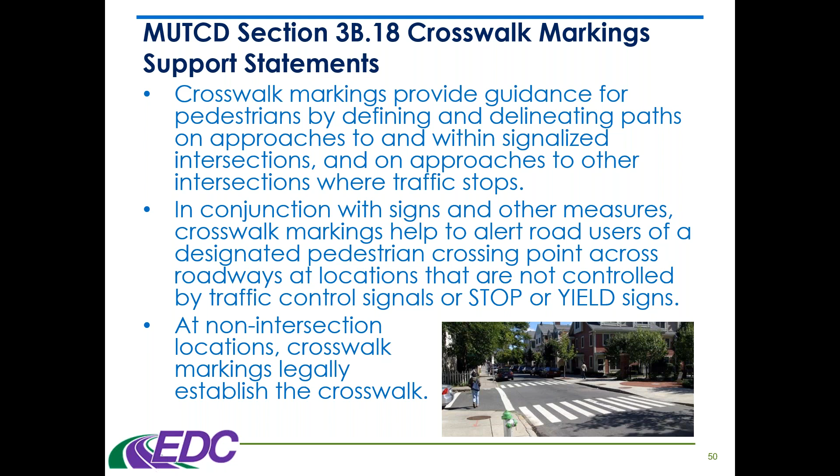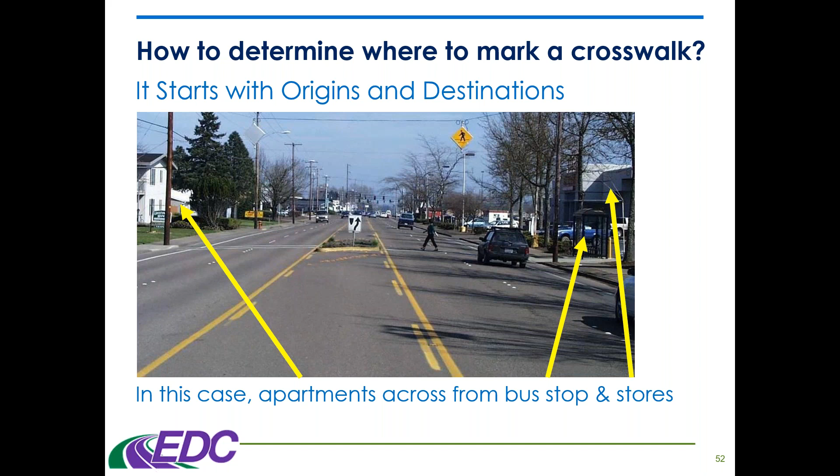This past week we left off right around here. We got into what the MUTCD, the standards involved with crosswalk markings, from the standards to guidance. And then we had a little discussion at the end about how to select a location for a crosswalk. You want it to make sense as far as looking at land uses, origins and destinations of the pedestrian. Like in this picture, we've got apartments on one side and commercial activity, stores and a bus stop over on the other side. So it just made sense to have that location right there.

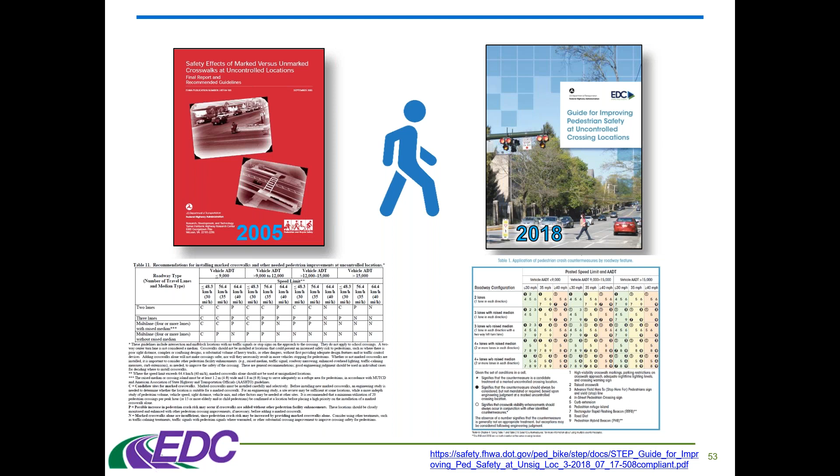And we talked about some of the resources available for you to research on your own. There's one from 2005 that covered the safety effects of marked versus unmarked crosswalks at uncontrolled locations, with a final report and recommended guidelines. And then a 2018 guide for improving pedestrian safety at uncontrolled crossing locations. And the one on the right has a table we're going to be utilizing as part of this class, a very important part of this class. We're going to delve into how to use that table here in just a little bit.

So today we're going to start off talking about the guide for improving pedestrian safety at uncontrolled crossing locations. It's called the STEP guide. As you can see on the right, it's a 6-step process for improving pedestrian safety at uncontrolled crossing locations. The majority of this workshop is going to focus on step 4 of these 6 steps, which is select countermeasures. As far as number 2 there, you see inventory conditions and prioritize locations.

Let's talk about that a little bit. The city of Seattle did not apply consistently how they installed their crosswalks, so they went back and installed their crosswalks per this table that we're going to be utilizing. It turns out that they used to lose lawsuits when there were pedestrian crashes, but now that they've used that table, they no longer lose lawsuits. So they actually removed some crosswalks with a stipulation that they had a priority list for future improvements. That is a lot like the ADA transition plans. Familiar with those?

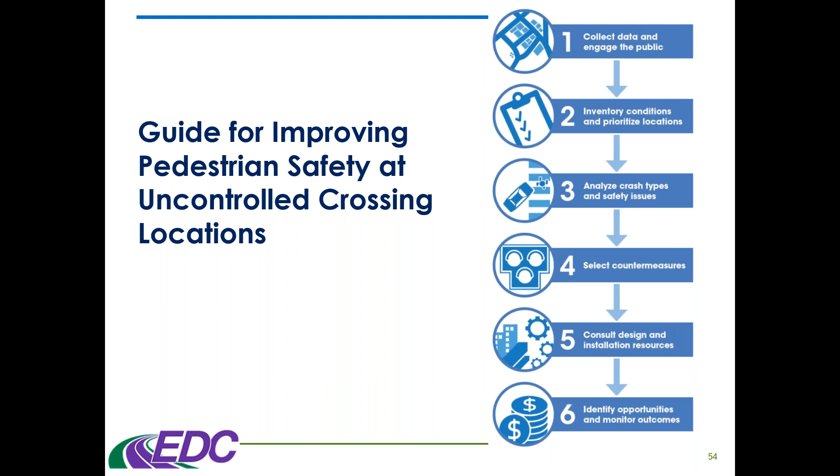And so this is the table that I'm talking about. It's one of the handouts on the right inside your webinar box. This is step 4, select countermeasures.

So what we have is the pedestrian crash countermeasures by roadway feature. On the left, you have your roadway configuration. You're selecting what type of road you're on. Are you on a 2-lane roadway, 1 lane in each direction? Are you on a 3-lane roadway, 1 lane in each direction, and a center turn lane usually?

It also says raised median. Then you have 3 lanes without a raised median. And then the next 2 are 4+ lanes with and without a raised median.

Across the top, you've got 3 categories of average annual daily traffic. The first one is less than 9,000. The middle one is 9,000 to 15,000, and the far right is greater than 15,000. Each one of those 3 is broken down into speed limits on those roads: less than 30, 35 miles an hour, and 40 and greater.

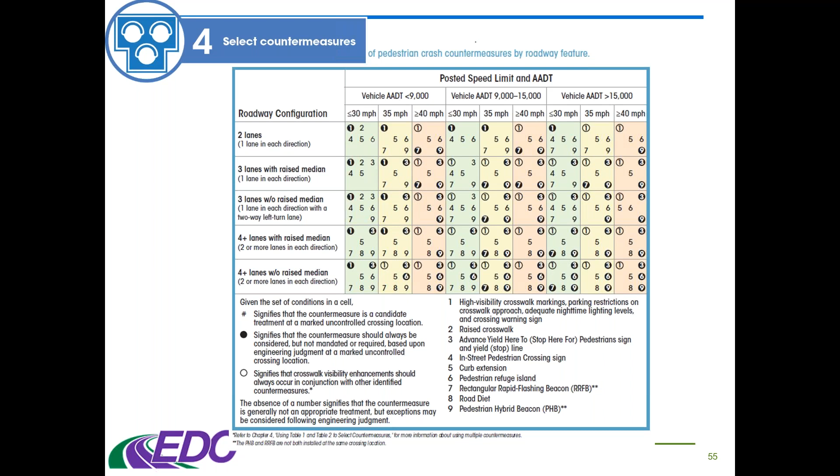Okay, so here is table 2, safety issues addressed per countermeasure.

As you go down there, yes—I don't know if it's just me, but can you move your microphone a little bit closer to your mouth? I think we could improve our sound quality a little bit here. Try it now. Closer—is this better? Yeah, that's definitely better. Thanks, okay.

Okay, so this is a table. On the left, it shows you the pedestrian crash countermeasure for uncontrolled crossings, and across the top is the safety issue addressed by that particular countermeasure. So when you're reviewing your crash data, you can see which one of this list of countermeasures would best address the issue noted in your crash data, so you know which countermeasure to select.

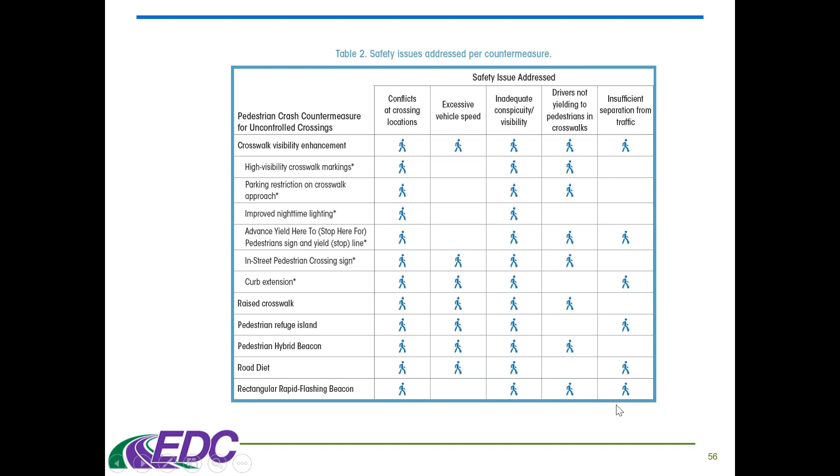So let's go ahead and do a quiz—like a quiz, it's actually just a little practice using this guide. We have a question at the top of the screen: what step treatment or treatments would you install in this particular situation?

So we're on a 35 mile per hour speed limit roadway. The roadway consists of 4 lanes with a 2-way left turn lane, and the average daily traffic is 14,500. So class, I want you to see if you can figure it out.

And they should put their answers in the question box? Yeah, let's put some questions to get a little practice using the question box as well. You can just put the numbers—you don't have to type in the whole answer, just the number associated with it.

All right, any comments? Somebody said 1, 3, 5, 6, 7, 8, 9. Next person said 3, 7, 9, 1, 3, 6, 7, 9, 1, 1, 3, 5, 6, 7, 8, 9.

This almost reminds me of that 80s song, you know, 8, 6, 7, 5. Sorry. Ray frequently breaks out a song in our office. Anytime you mention 80s music, it just puts me in a good mood. So thanks for that.

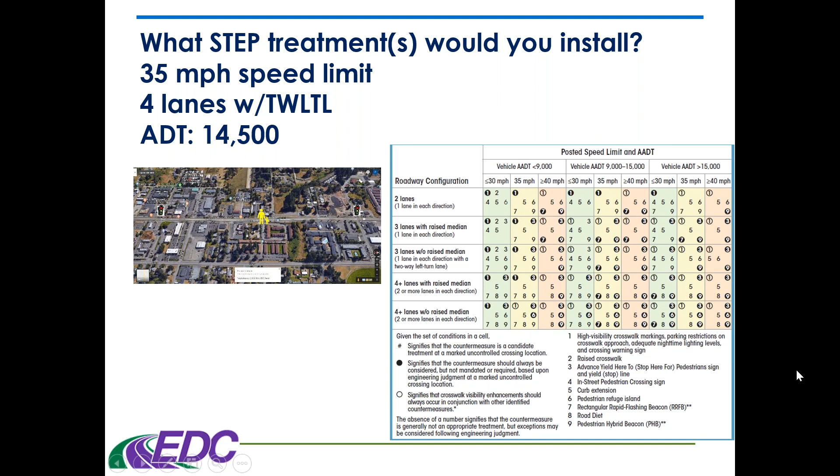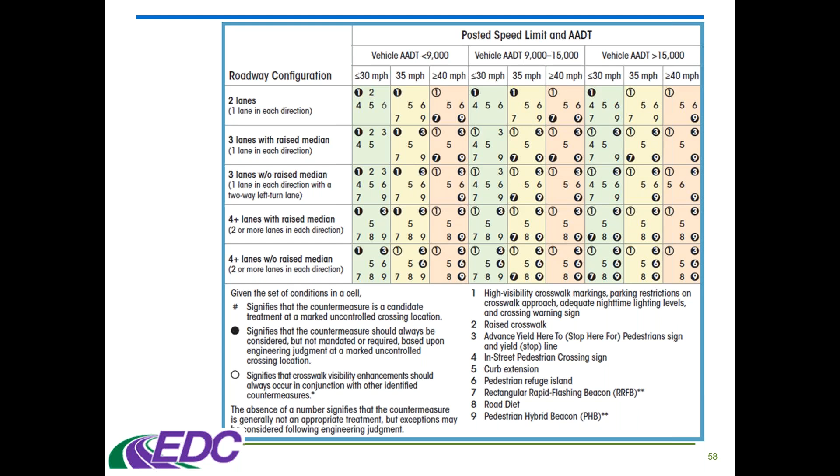Okay, let's move on. Now that we've had our practice, this is, I guess I could have turned the page so we could actually have a little easier time of looking at it there. There's the blow up of this table. Okay, so now let's get to the fun stuff, which is the treatments.

We call these treatments the Spectacular 7. You could play off the Marvel or DC comic superheroes, because we think of these as spectacular in the fact that they save lives.

And even the RRFB, the rectangular rapid flashing beacon, it actually died and came back to life. When it first came out, everybody was really gung-ho about it, and then all of a sudden they said, uh-oh, no, we're not. Then after further review, it's back on the list. So it actually came back to life like a superhero. That's why we refer to these as the Spectacular 7.

So when I say Spectacular 7, I'm talking about this list: crosswalk visibility enhancements, raised crosswalks, pedestrian refuge island, the RRFB, PHB (pedestrian hybrid beacon), road diets, and the leading pedestrian interval.

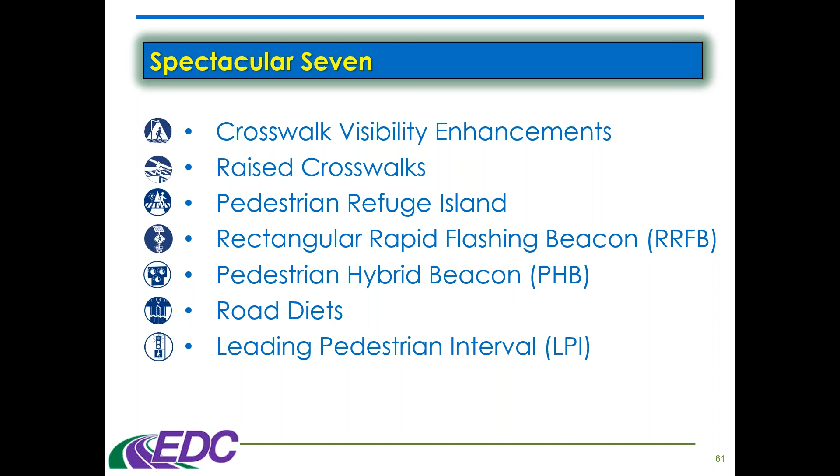First on the list we want to talk about is crosswalk visibility enhancements. We start with them because we introduce these from the simple and lower cost countermeasures to more complex and higher cost countermeasures. Simple and complex can refer to both the device or the roadway.

Road diets is down towards the bottom, even though it could fall under lower cost if it's planned ahead to where they are doing a resurfacing project. However, it really wraps things up well, since it has many benefits to all modes and allows many of the treatments to be installed, like median crossing islands and curb extensions. Reducing the number of lanes also reduces or eliminates the multi-threat situation, which in turn can keep an agency from using higher cost treatments like the PHB.

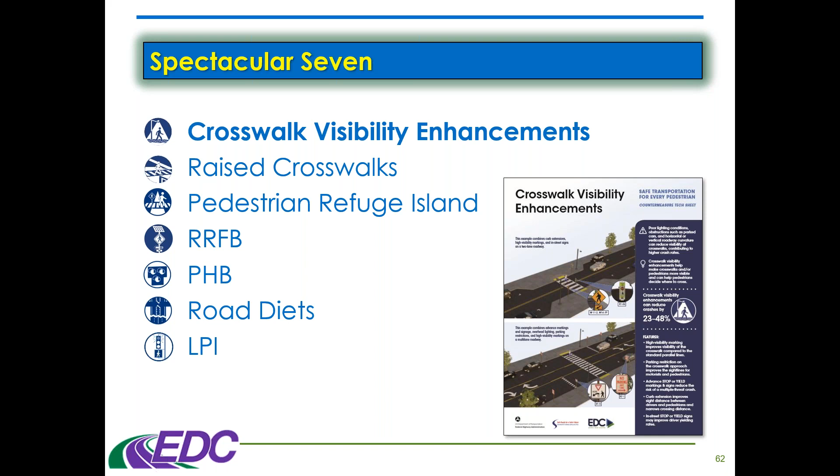There are several items that fall under crosswalk visibility enhancements, which we're going to be covering in the upcoming slides. But I think maybe I can show you a cool video that shows these before we go into that. Let's see if I can get this video to work for you.

Just remember to unmute yourself at the end, Ray. Okay. Takes a few seconds to upload. Oh, wait, I gotta do this.

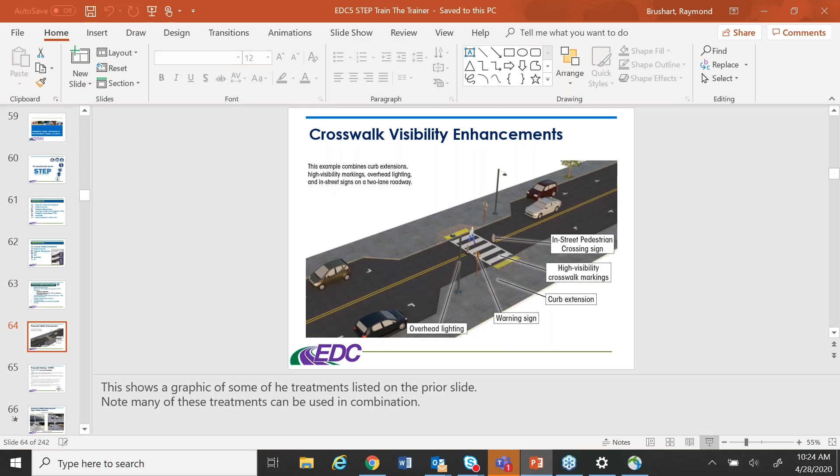Okay, that was a pretty good video, wasn't it? So it showed a lot of these on this list in that video. In fact, I think it showed all of those, so it's pretty good.

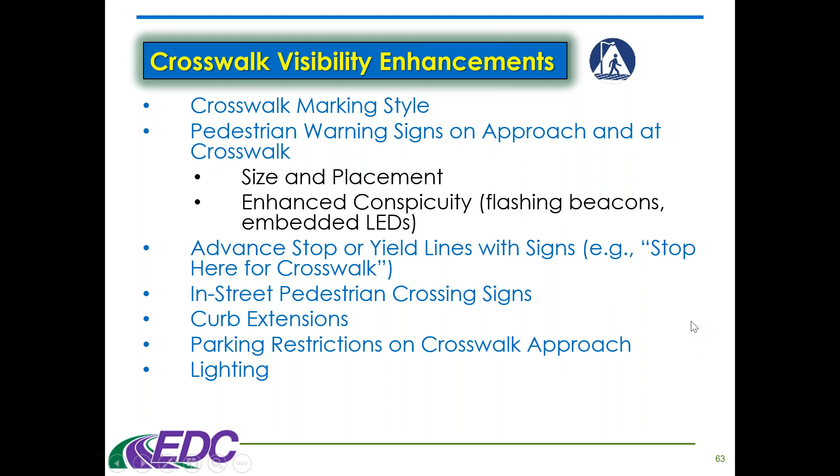So crosswalk visibility enhancements. Here we see in the picture some treatments listed on the prior slide, and many of these treatments can be installed in combination with others. Here we see curb extensions, high visibility markings, overhead lighting, and in-street signs on a 2-lane roadway.

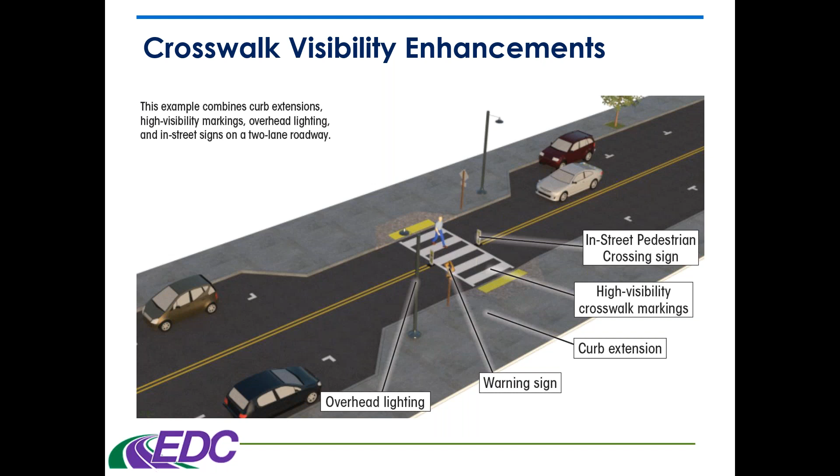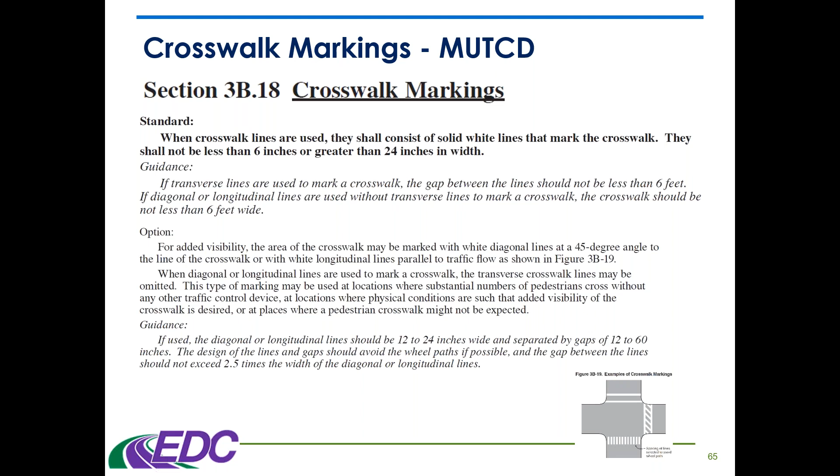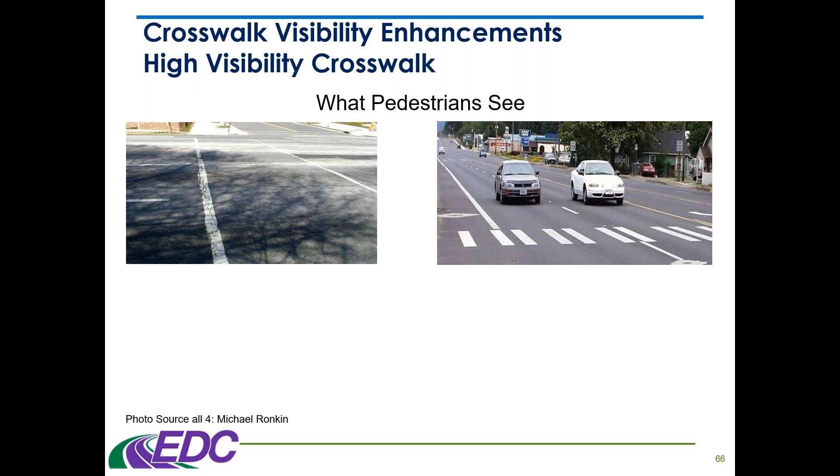And also, if you remember from our speed video in round 1 of this webinar, we had a cool video from Australia showing the difference that when the driver slows down just 3 miles per hour as they approach a high visibility crosswalk. So maybe someone seeing the high visibility crosswalk on the right just might slow down those 3 miles per hour and make a difference.

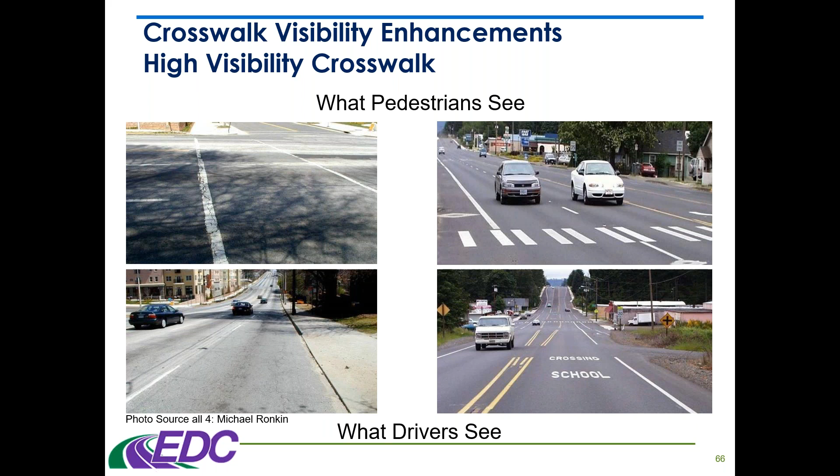So there was a crosswalk visibility study conducted back in 2010. The objective was to investigate relative daytime and nighttime visibility of 3 different crosswalk patterns: the transverse lines, which are those 2 lines on the left, and then continental and bar pairs. They're kind of similar looking, but there are some differences. So this study delved into researching if there's any significant difference for the driver to detect these as they approach.

There were 78 participants, about evenly divided between male and female, and between younger and older groups, younger than 55 and older than 55. They used instrumented vehicles on an open road route on the Texas A&M University campus. Data was collected during the day, either sunny and clear or at most partly cloudy, and at nighttime with the street lights on.

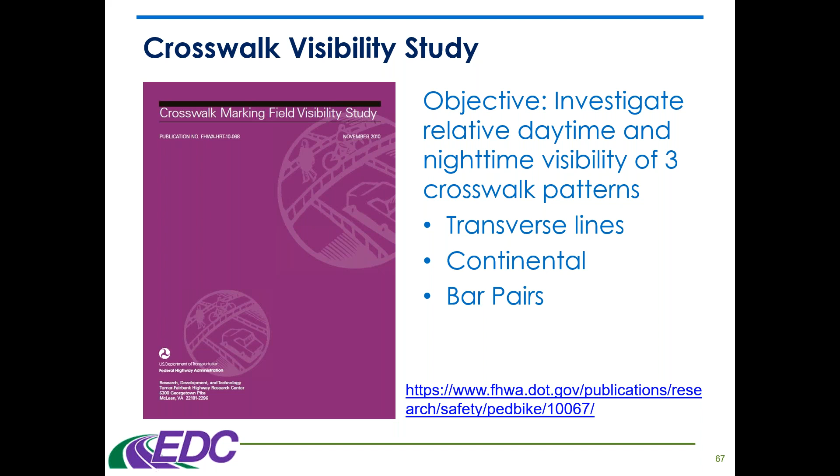For the existing mid-block locations, a general observation was that the continental markings were detected at about twice the distance upstream as the transverse markings during daytime conditions. This increase in distance reflected 8 seconds of increased awareness of the presence of the crossing at 30 mile per hour operating speeds.

That was very significant. So here's some more pictures from this study. The top picture shows us the transverse markings, the middle picture is the installed continental markings, and the bottom picture is the installed bar pair markings.

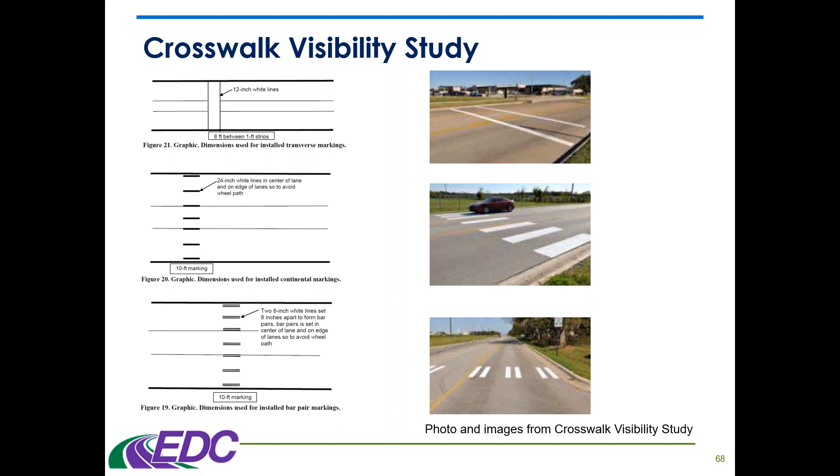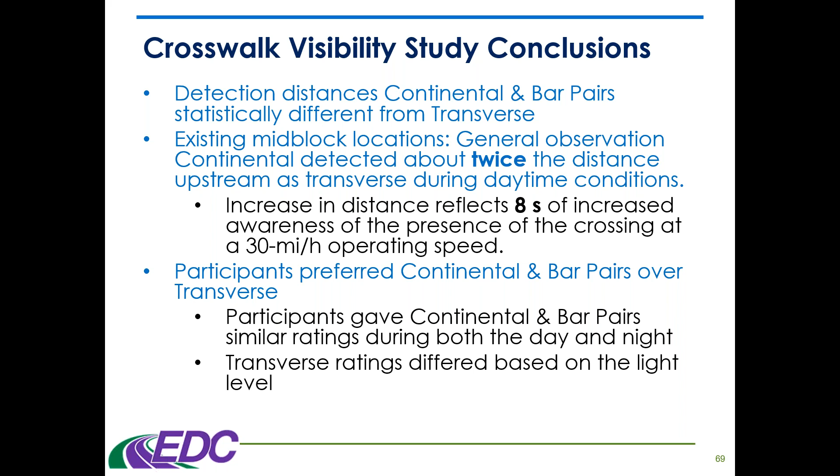So, the conclusions of the study: the continental and bar pairs were statistically different from the transverse lines. The general observation for the mid-block was that they were detected about twice the distance upstream as transverse during daytime conditions, reflecting 8 seconds of increased awareness of the presence of the crossing at 30 miles per hour operating speed. The participants preferred the continental and bar pairs over transverse, and gave continental and bar pairs similar ratings during both day and night. Transverse ratings differed based on the light level. Those are some conclusions from that study.

So let's take a look at how it is possible for the continental and bar pairs to provide greater visibility. As we see in this picture, see what the driver sees. He can detect that lateral 12-inch stripe at a distance of 300 feet. But the angle is different because of how the bar pairs are laid out there, so it's easier to see from that distance.

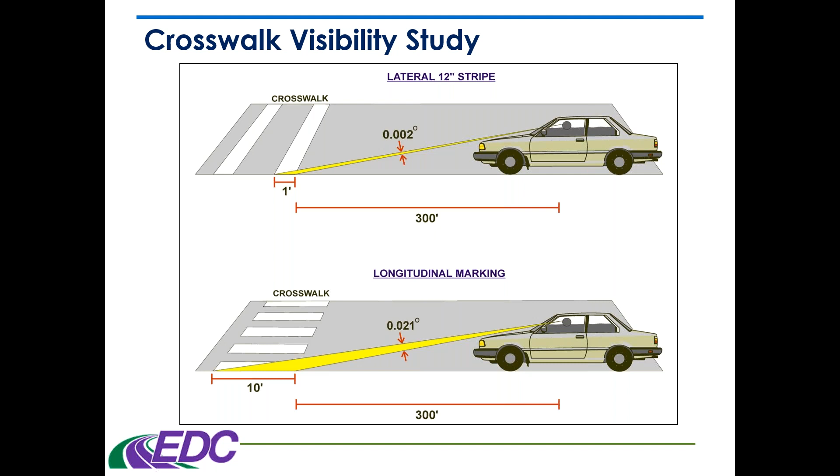Okay, so those are the crosswalk stripings there. Now let's take a look at textured crosswalks. How effective are they?

So the next 5 slides, we're going to cover this issue as we're seeing more of these textured crosswalks due to agencies wanting aesthetically pleasing roadways. The images during the public meetings look great, but one needs to consider them long-term as shown on the next couple of slides. They do look very pretty in this picture.

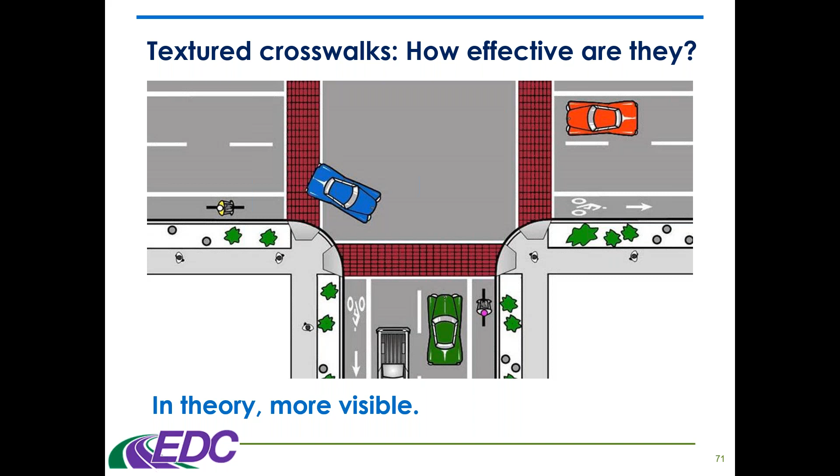And here's one with bricks. So you have your brick crosswalks. Turns out they are prone to failure after a little bit of time, as you can see. They can be difficult for wheelchair users. So one of the things we need to consider when we make these decisions is maintenance of this roadway.

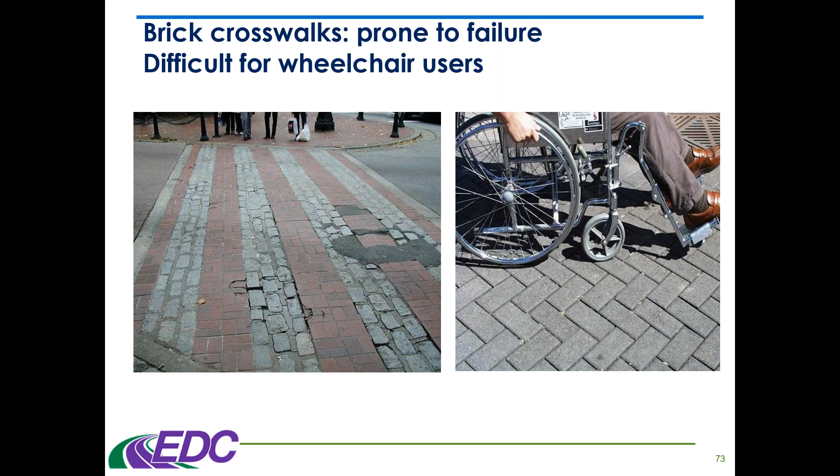Maintenance should always be considered. In this case, maintenance people need to have a saw. In addition, people in wheelchairs feel the bumps a lot. Can you imagine if someone's trying to cross the street if they had spinal injuries? So you have to consider that.

Ray, there's a question in the question box. I'm not sure if we have the answer to this, but are brick crosswalks ADA compliant?

We can always find out. Yeah, I mean, they had to get approved somehow, but I don't know. Yeah, we'll dig into that one. Let me email a couple people while we're on here.

They're probably ADA compliant when they install them. It's just a matter of, as you can see, what happens over time.

I didn't have to email anybody. Here's the answer from another one of the participants. It says, yes, they are ADA compliant if there's no bump greater than a half inch.

So I would imagine that has to have ongoing monitoring then. Hey, I went to Ohio University in Athens, Ohio, so I'm all about brick streets.

They do say that over time the bumps tend to worsen. Yeah, I would say you have to have a good maintenance program.

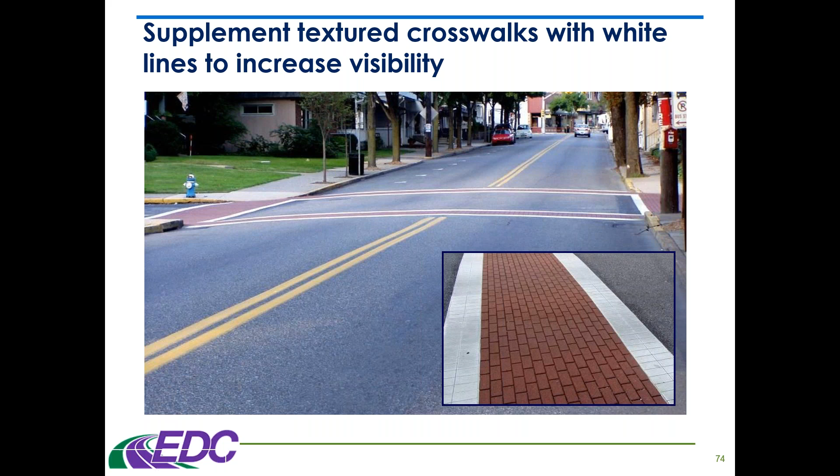Okay, class, let's take a look at these pictures here and you tell me if these are MUTCD compliant.

Go ahead and put your hand up. Yeah, they're responding. I'm hopeful this means that quite a few of them have also seen the webinar we hosted on compliant crosswalks.

One person said yes because they stand out very well, but the majority are saying no. Some people said they look good, but they don't appear compliant. Some are saying that the zipper pattern is a no, but the yellow is a yes. Another person said yellow is not an approved color. Well, they are pretty though.

General sense seems to be no. Okay, so normally the responses are mixed, but it turns out neither of these are compliant.

So on my next slide, I'm going to provide the text of an interpretation memo from the MUTCD team on this issue. Crosswalks are traffic control devices, and if confusion occurs and someone gets killed, the agency who has jurisdiction would probably lose the lawsuit. And of course, there are probably more MUTCDs, the manuals, on lawyers' desks than engineers' desks.

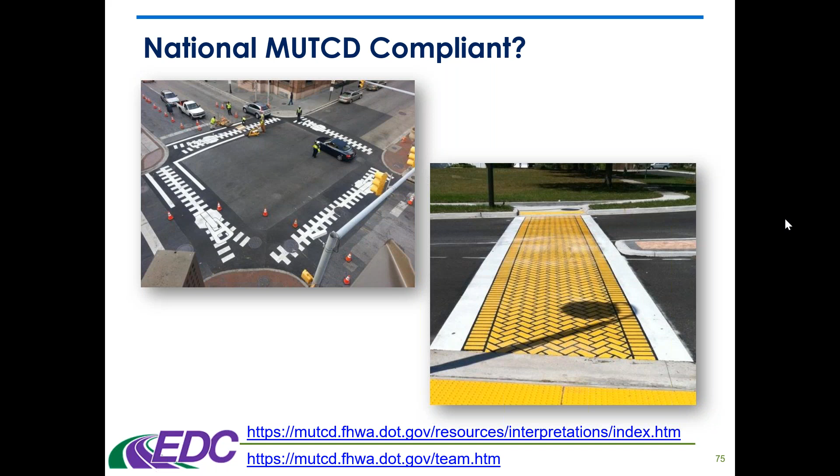This is a ruling from the MUTCD on August 15th, 2013 regarding colored pavement in crosswalks. In the late 1990s, the marketplace introduced and promoted aesthetic treatments for urban streetscape environments that included the opportunity to install a range of colors and a multitude of patterns. The most popular opportunity to implement these treatments was between the legally marked transverse lines of crosswalks. This was typically done as part of larger efforts by cities to enhance the aesthetics of an area that could include decorative luminaires, street furniture, sidewalk art, etc.

These crosswalk treatments were publicized and marketed as a method to increase conspicuity of the crosswalk that would translate into increased safety and a reduction of pedestrian deaths. In December 2001, the FHWA issued its first official ruling regarding the use of these aesthetic treatments, which concluded that crosswalk enhancements of this type had no such discernible effect on safety or crash reduction.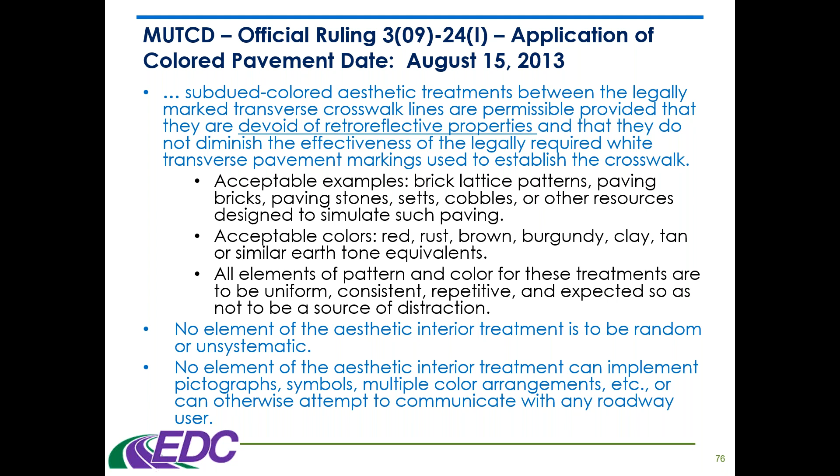All right, so those are the pavement markings. Let's see if there's any other questions about the markings. If not, we're going to go into the next treatment, which are the warning signs.

There is a section in the MUTCD about pedestrian warning signs. These may be used to... There's a question asking if we know whether art crosswalks have an impact on vehicle speeds, and another asking if we could point to a source on the effectiveness of crosswalk art.

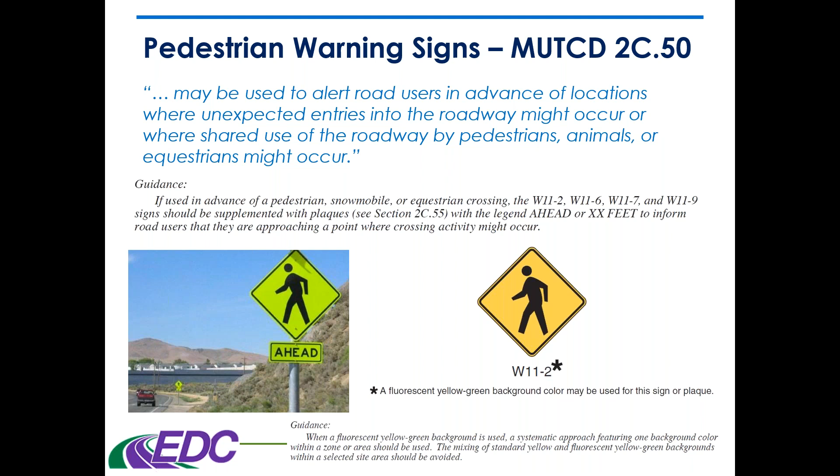We can enhance these with embedded LEDs in the signs. For instance, embedded LEDs in a stop sign has been studied, showing a 28.9% reduction in the number of vehicles not fully stopping, and even better, about a 53% reduction of vehicles moving through the intersection without significantly slowing. There's some pictures there, and also a link to find more information about the LEDs.

So I could ask you a question here: when a beacon is on 24/7, what tends to happen to driver behavior? If the beacons are flashing constantly, what happens to driver behavior?

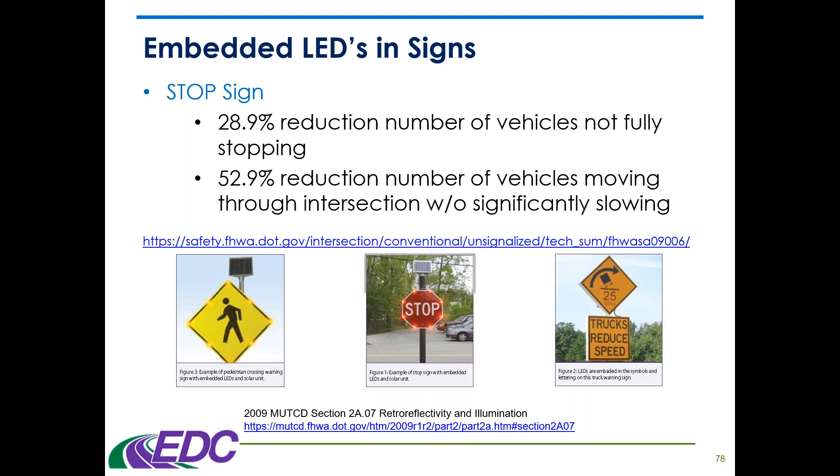Let's take a look here. Looks like some sort of underground parking garage, but it has a pedestrian crossing — or it's like a drive where people drop off. It might be, I don't know, it's a parking garage apparently. Let's see — I want you to focus on the LEDs here.

I'll even do it one more time. You might just have to narrate it, Ray, because it's kind of running slow. Oh, is it? All right, well.

So if you note, there's two signs there, one on the right and one on the left, but the one on the right is much brighter than the other — maybe the angle makes a big difference. The cost can vary from $300 to $2,000 depending on what hardware you're buying. They sell just the border and solar to install onto existing signs. If using APS push buttons, follow the recommendations in the RRFB interim approval, which will be discussed in the RRFB section.

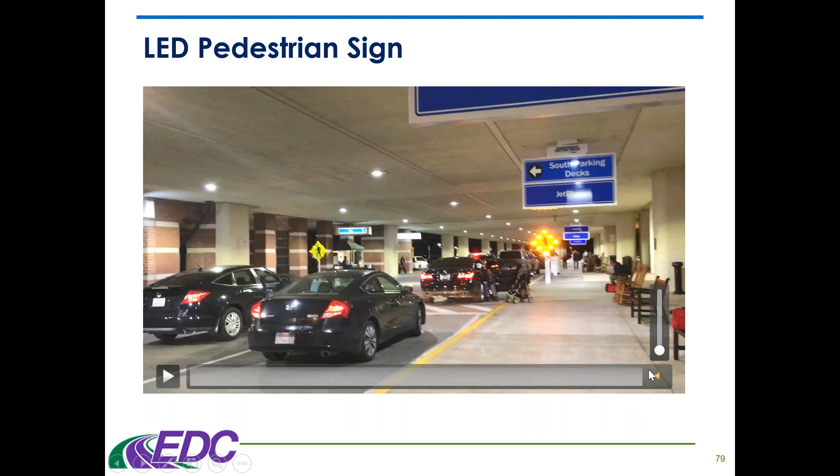So we touched on this a little bit in part one. Let's go ahead and talk about it some more: the multiple threat crash location.

This has to do with multiple lane roadways, like 4 lanes or more. In this picture, car A on the right stops to let a pedestrian cross, but stops right up at the crosswalk, blocking the sight lines the pedestrian has of the next through lane. The driver of the second car doesn't stop because he doesn't see the pedestrian, and the pedestrian doesn't see him either. So the pedestrian walks right out in front of the car going at high speed. We need to figure out how to prevent this multiple threat situation from happening.

So we're going to look at the next few slides and cover a low cost treatment to prevent this from happening.

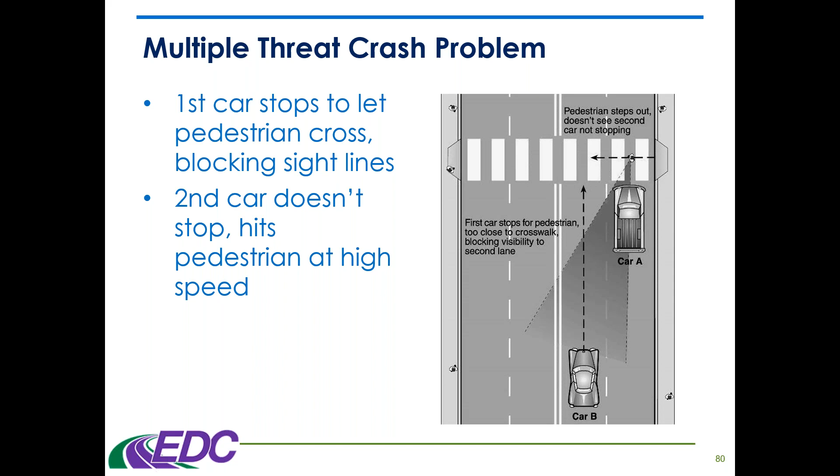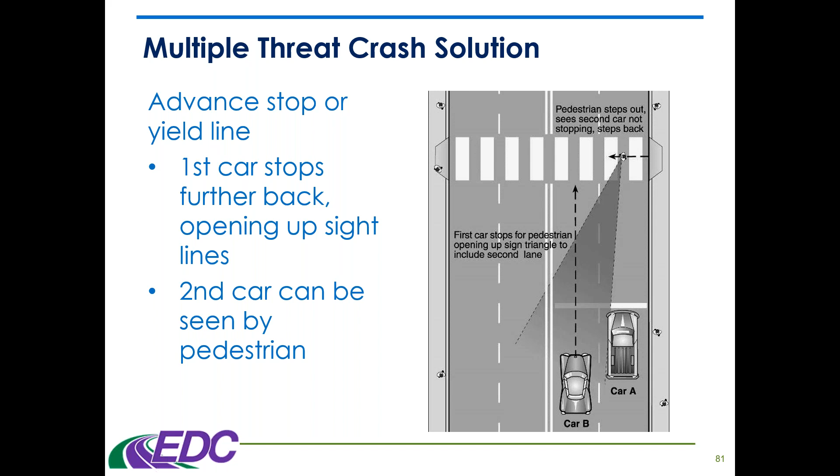Here we have an advance stop or yield line. Car A stops further back away from the crosswalk, which opens up the sight lines for both the pedestrian and the motorist, so the second car can be seen by the pedestrian. In most cases, the crash is avoided because the pedestrian steps back and takes evasive action. Rarely can a car traveling at 40 miles per hour stop in time if the driver has to react at the last second. Some states have a yield for pedestrians law, shown on the next slide.

Here's what the MUTCD says about examples of yield lines at unsignalized mid-block crosswalks. There's guidance for the shark tooth stop bar or yield bar to be anywhere from 20 to 50 feet back. That's the MUTCD range, but many agencies use 30 feet. Depending on the law, agencies will use one or the other, but it is a shall condition as shown by the language in the MUTCD on the next slide.

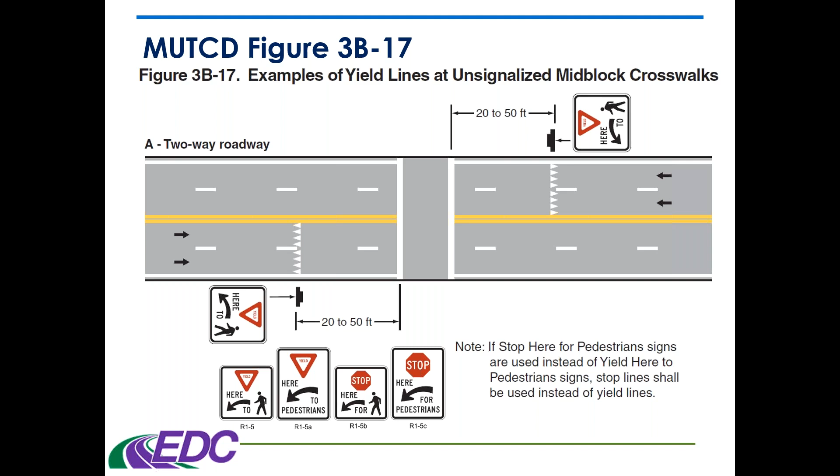The shall is a standard. It says 'yield here' or 'stop here for pedestrians.' Signs shall be used if yield or stop lines are used in advance of a marked crosswalk that crosses an uncontrolled multi-lane approach. The 'stop here for pedestrian' signs shall only be used where the law specifically requires that a driver must stop for a pedestrian in a crosswalk. The legend 'state law' may be displayed at the top of the R1-5 signs if applicable.

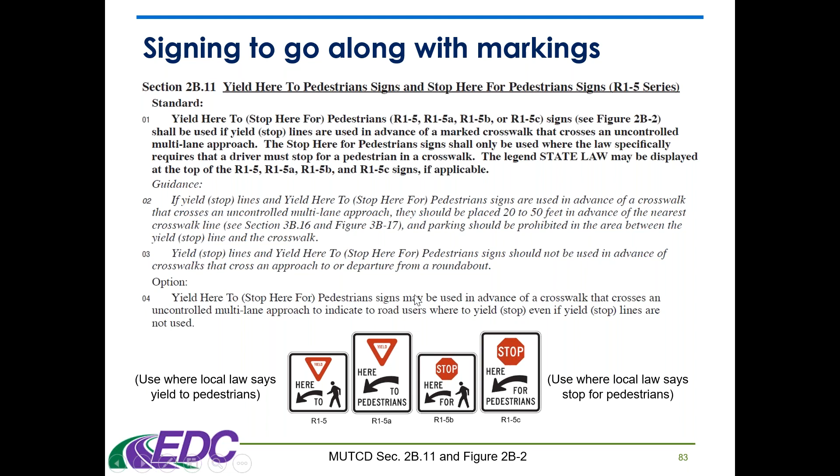They even have guidance and options to go above and beyond that as well. Here's a picture of the 'yield here for pedestrian' shark tooth line. States with a yield to pedestrian law should adopt the shark's teeth yield line rather than a stop bar. Also, to discourage passing a stopped vehicle, double white lines can be used prior to the yield or stop bars.

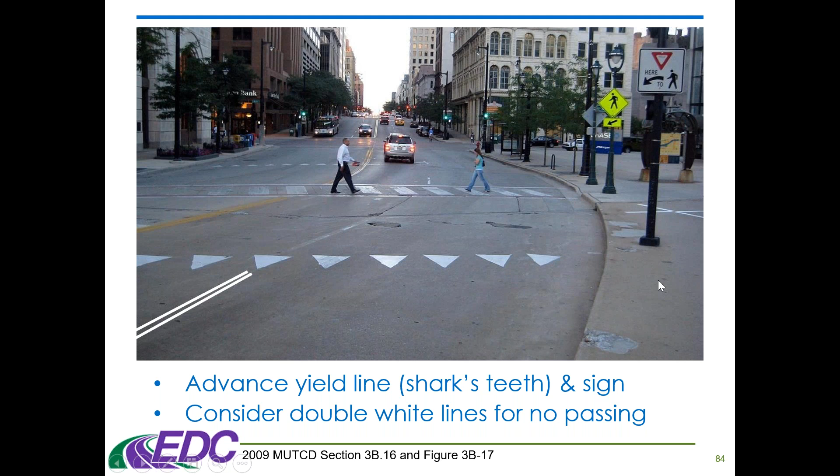Next, we have our in-street pedestrian crossing signs, R1-6 or R1-6A. One's yield, the other stop.

Does anybody in the class today have any experience with these signs? These have been around long enough where a lot of agencies are already using them. If you are using them, are they installed on a 40-mile-per-hour roadway? We have one person that said yes, but they don't have them installed on a 40-mile-per-hour roadway. Well, that's good.

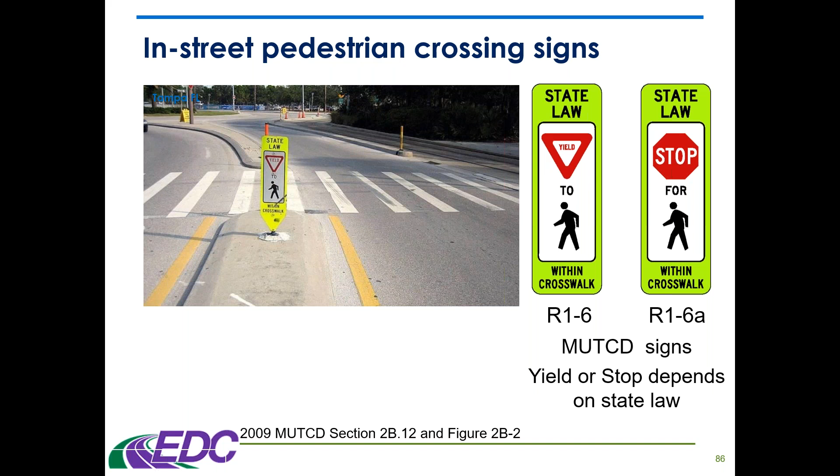So here's some MUTCD standards with these signs. They shall be placed in the roadway at the crosswalk location, on the center line, on a lane line, or on a median island. They shall not be post-mounted on the left-hand or right-hand side of the roadway. Unless placed on a physical island, the sign support shall be designed to bend over and then bounce back to its normal vertical position when struck by a vehicle. The top of the sign placed in an island shall be a maximum of 4 feet above the island surface.

So the MUTCD is a national standard. Of course, every state has the option to tweak it the way they see fit, as long as it's very close to that. So one might ask the question, since many think that the Manual on Uniform Traffic Control Devices is guidance, it says here that the MUTCD is not a guidance document. There is guidance in the manual, but the manual itself is the national standard.

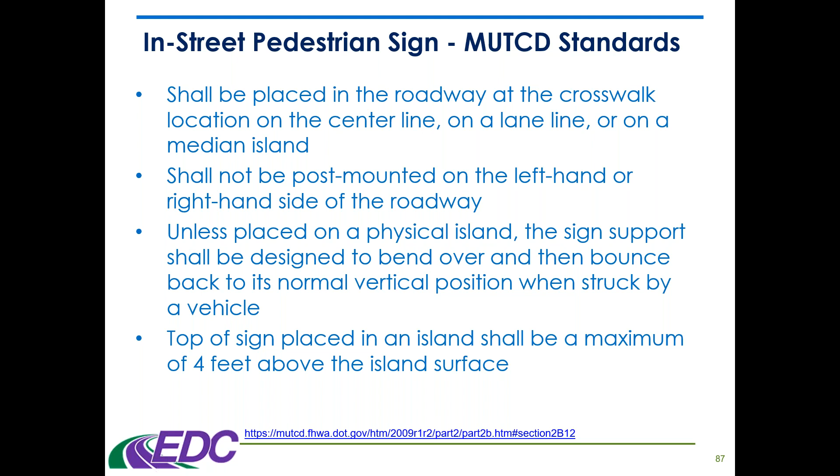With that said, this slide shows the conditions the in-street sign can be used. So we're going to take a look at the next few slides that show an application where the agency had to go through the experimental process using these signs in a manner not originally intended, but effective.

There was a question that came in. So did you say not to use at or above 40 or 45 miles per hour? I said to not use at 40 or above. And then another person mentioned that Michigan uses a variation that says quote unquote 'local law,' as there is no state law referencing mid-block crossings.

And of course, Michigan is probably like Ohio. Ohio is a home rule state, so the cities and villages are in charge of their roadways with their standards. It's good to develop some standards in writing when you do that.

So this slide is called the in-street gateway treatment, and it's promoted by AASHTO. On their website, it provides some resources about this. But you can see from the picture on the right, it is using the in-street signs on both sides of the traveled way, therefore the name gateway treatment. In some configurations, like the one shown in the picture, they use a delineator post on the dividing line. The configuration in the photo is not MUTCD compliant, and therefore the state had to go through the MUTCD experimental process.

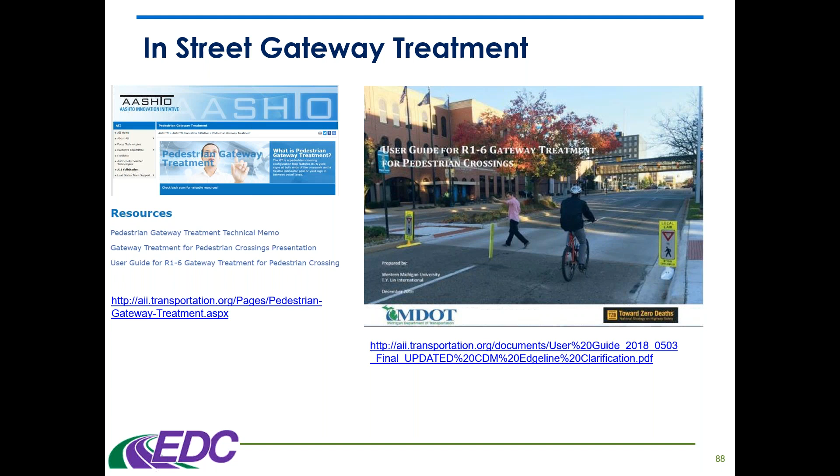So here's some research abstract key points on this. It says when used, there is an increase in the percentage of drivers yielding to pedestrians at mid-block and multi-lane urban and suburban locations from 15 to 70%, and that these increases endured without any decrement over the spring, summer, and fall of 2016. Speed data collected at each site showed a 4 to 5 mile per hour reduction in the mean when motorists traversed the crosswalk when pedestrians were absent.

These speed changes persisted over time. An additional study showed that placing the signs at 5, 10, 20, 30, and 50 feet in advance of the crosswalk were equally effective, and they enticed drivers to yield further ahead of the crosswalk.

So the second one brings us back to the speed video from Australia we looked at in the first part of the webinar. The speed video showed how important it was for drivers to slow down by even 3 miles per hour. And this one is showing an average of 4 to even 5 mile per hour reduction of speed before they got there. So that makes a big difference on whether a pedestrian is going to get hit, you know, it's a big difference between no injury and a serious injury or worse.

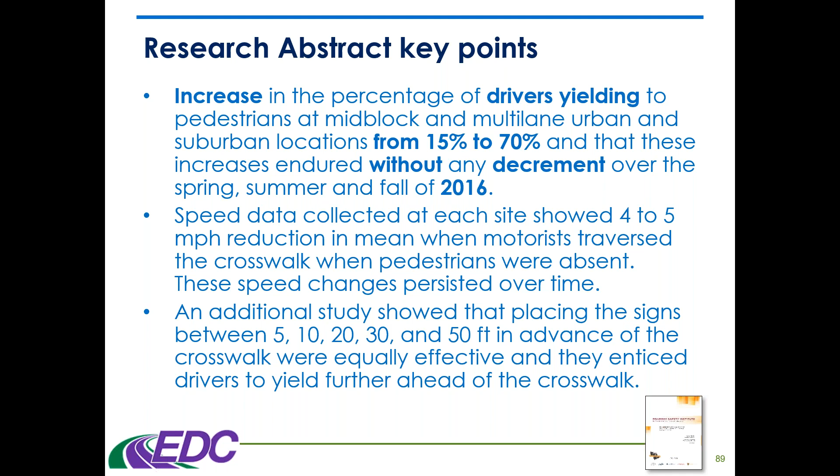So here's some more abstract key points. It says signs mounted on a curb type mount with a flexible rubber attachment all survived, while only 58% of the flush mounted signs with a pivoting base survived. So if the person that says they're having problems keeping these installed, you might want to look at the type of hardware being used to attach them. They're recommending you use a curb type mount with a flexible rubber attachment instead of the flush mounted signs with a pivoting base.

And it says none of the signs mounted on top of the edge of a curb on a refuge island or median island curb extension or the curb on the edge of the roadway under FHWA permission to experiment were destroyed or damaged. So maintenance should always be considered, and this report shows which types of mounts as well as locations had a higher survivability rate.

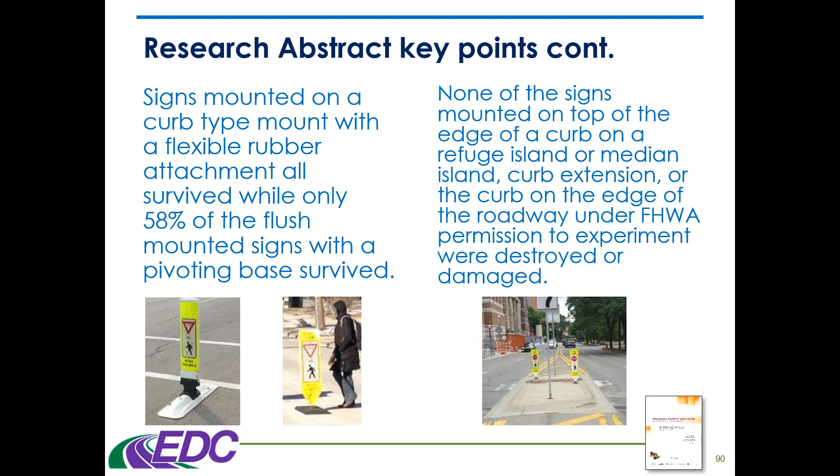So there's some things to think about there.

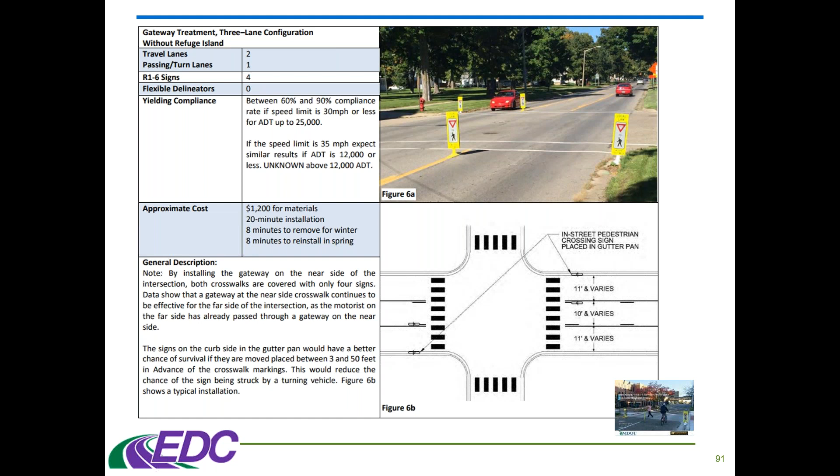Okay, so that's what I have for our gateway treatment.

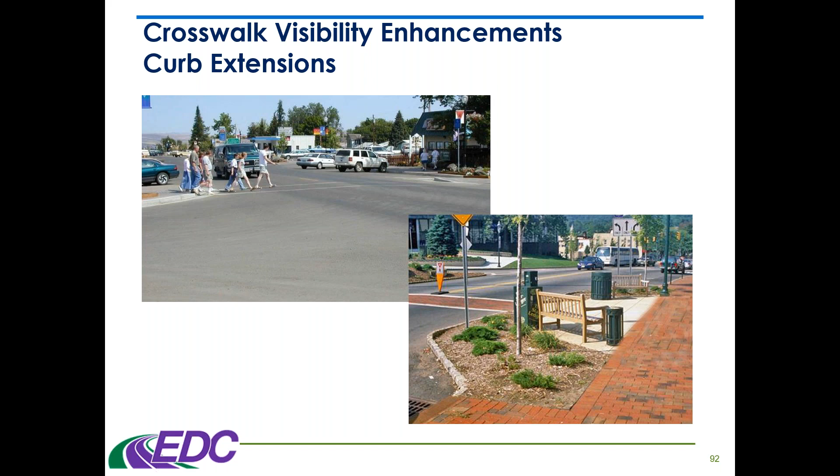Now let's talk about our crosswalk visibility enhancements for curb extensions. So the next 12 slides, I'm going to show you some curb extensions. They can be installed at intersections or mid-block. So there's some good landscaping and street furniture there as well in the curb extension.

Okay, so most curb extensions focus on reduced crossing distance for the pedestrian. So let's see what happens when I click here. See how I installed that? Currently there's 58 feet for the pedestrian to cross. With this design of a curb extension, we necked it down to 32 feet.

So with that, you have some advantages. You have better visibility between peds and motorists. It's a traffic calming device, and there's room for street furniture. So curb extension should be the width of the parking lane and should not encroach on bike lanes or travel lanes.

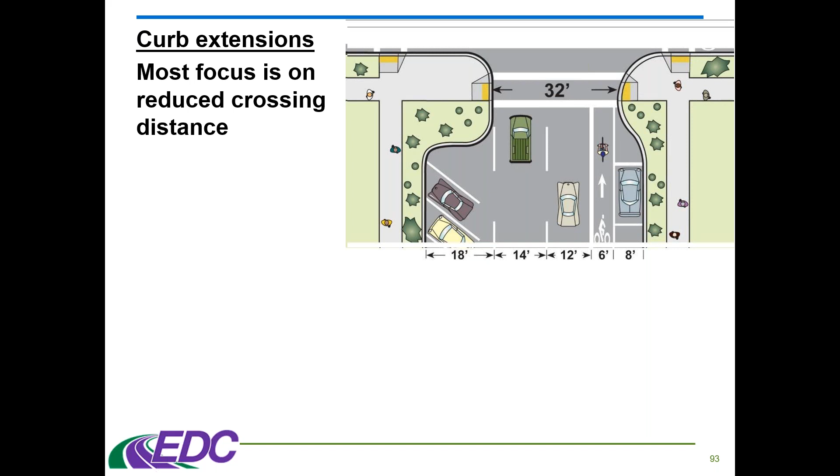So anytime you have permanent parking, there is the opportunity to put in curb extensions. There's also two different radius designs. The one on the right may be easier for street sweepers, while the one on the left might have to be hand swept. So when designing, talk with maintenance about what their trucks can do. That's something to consider.

So they even configure the parking differently here. This one shows how you have better visibility when you draw the pedestrian in closer. They can see better around the parked car. And the green vegetation should not block the line of sight. So special attention should be paid regarding trees, the type of trees you have.

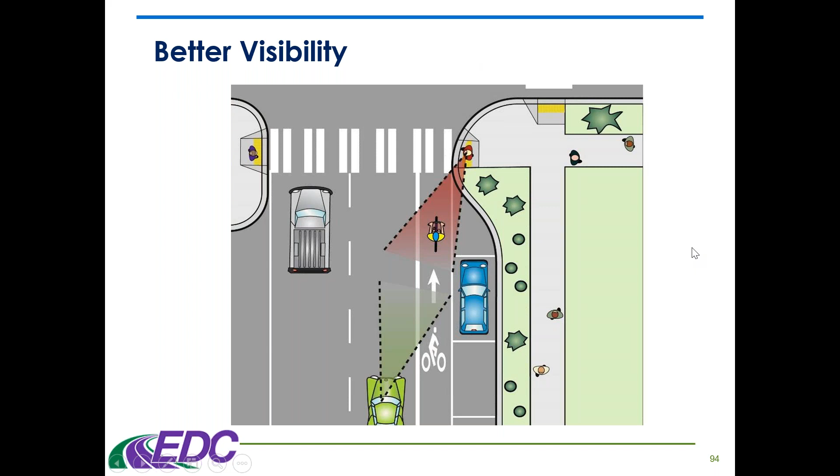How about the drainage of the roadway? How is this going to impact drainage? Drainage is always an issue and can definitely raise costs once you determine that drainage needs to be upgraded or re-engineered.

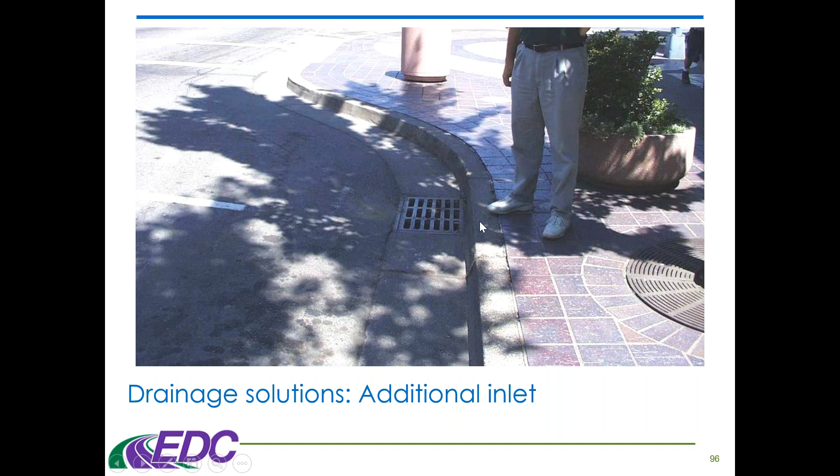But when we look at the curb extensions, you can see how the drainage grate is placed in this picture here. Doesn't look like they moved the drainage grate in that situation.

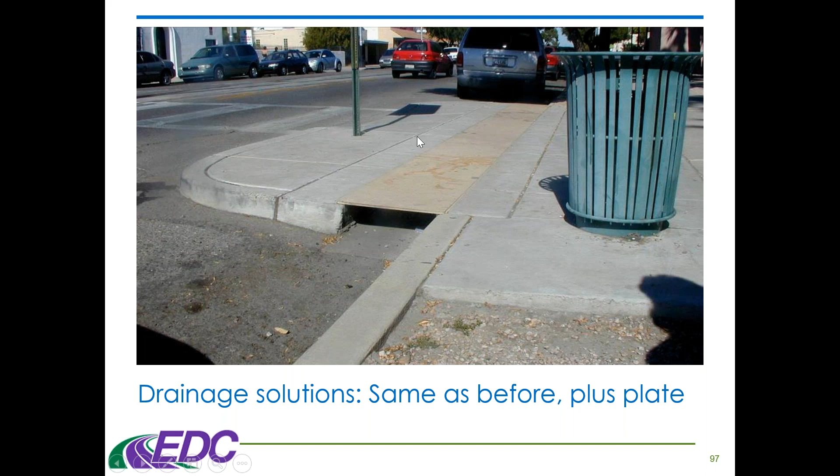Let's see, here's a before picture. Road looks and feels really wide. So this is how the street looked before reconstruction, much wider. It has the same capacity, but is less safe. This photo was taken from the last curb extension of the built project.

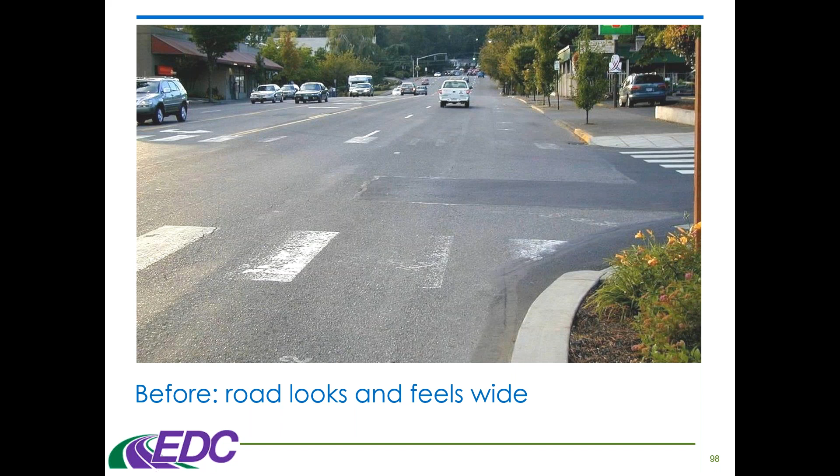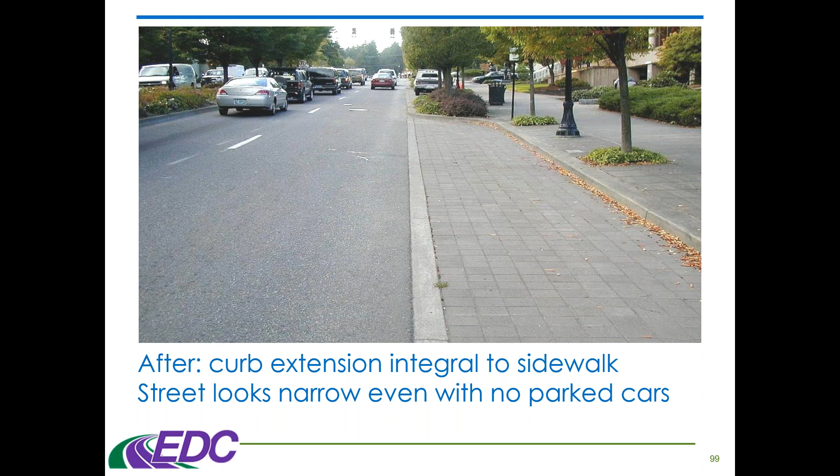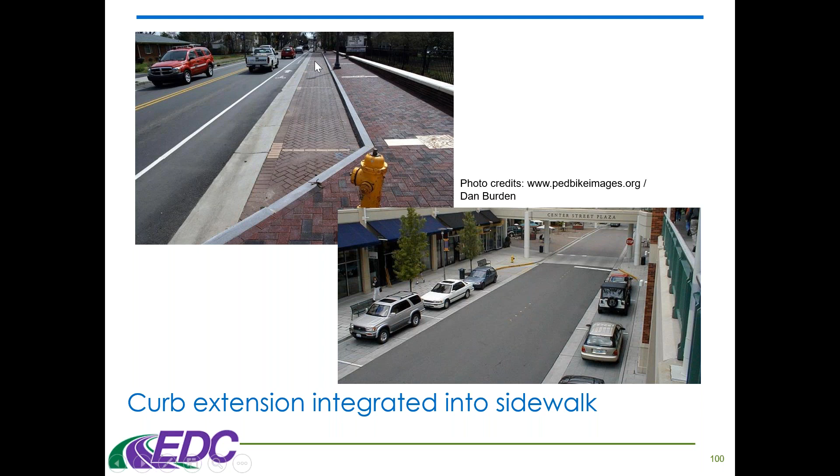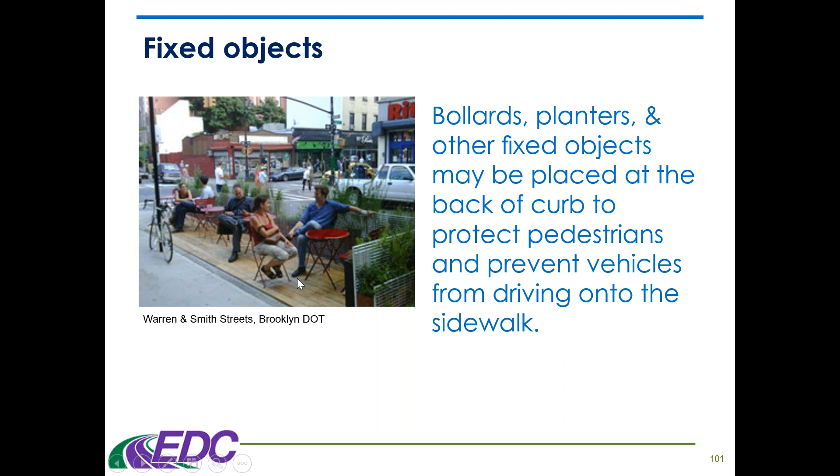How about if we don't have a curb extension, or it's not even a possibility? One thing you can do is limit parking near a crosswalk. On-street parking should be restricted at least 20 feet in advance of the crosswalk to allow for good visibility of pedestrians.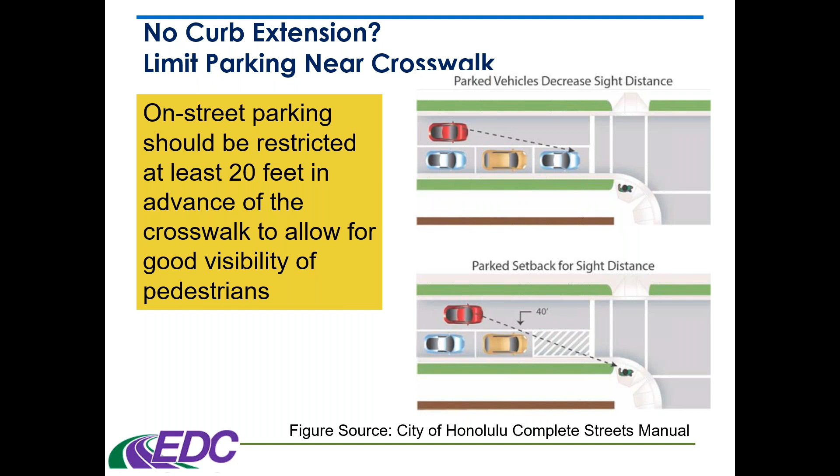A lot of discussion gets into the size of your curb radius. A lot of cities have their own standard size of a radius, and the problem with the standard size is it usually favors the vehicle without considering the needs of the pedestrian.

When you're a pedestrian, a large radius increases the crossing distance and makes the crosswalk and ramp placement more difficult. Design guides point out the obvious consequence of a large corner radii along crosswalks, but there are other negative consequences. They pull the intersection apart and make it hard to place ramps and crosswalks where pedestrians want to cross. I know we need to accommodate trucks, but oftentimes agencies may have a default corner radius that's designed more with the truck in mind rather than a pedestrian.

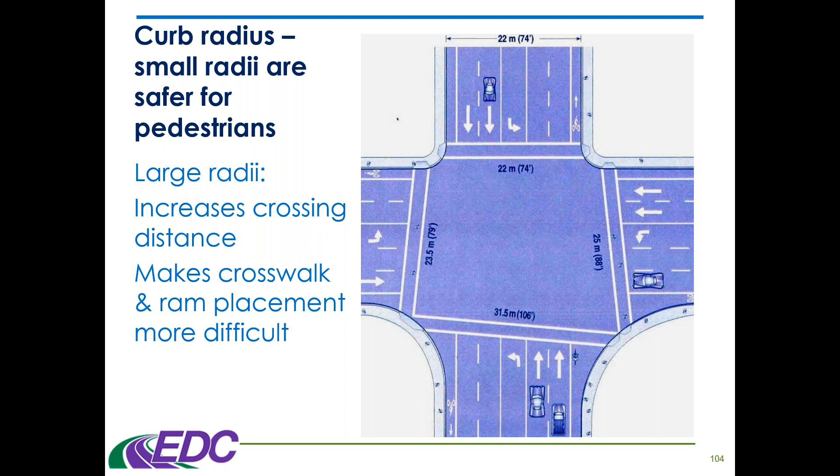So we encourage having a smaller default radius and making it larger to accommodate trucks, which is a concept of complete streets. Let's see how we can accommodate both here.

Here we have a truck making a right turn with this large radius, and it makes it hard to figure out where to cross. So this is a camper going straight, and this pickup truck's making a right turn. This pickup truck behind the camper is looking left due to the gap provided and may start accelerating before even realizing that there's a pedestrian trying to cross.

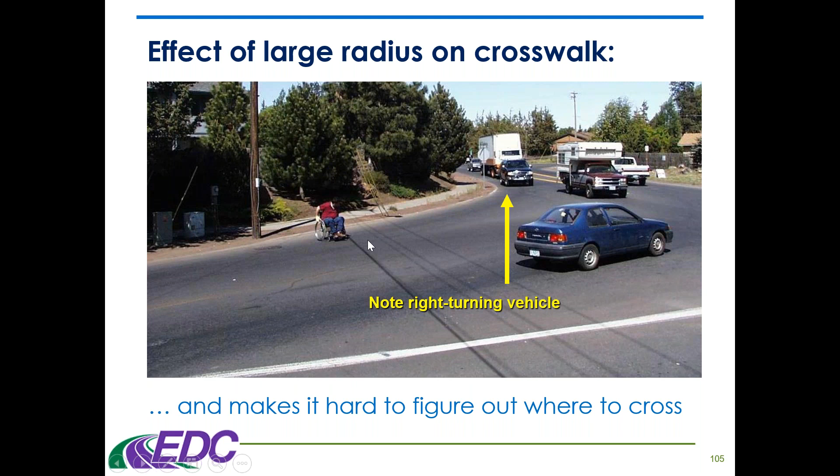So in this picture, let's see how we can deal with this. We want to minimize the curb radius with a truck apron.

Let's see what I did here. We got two radii in this picture: the effective radius and the actual curb radius. R1 is this actual curb radius. R2 is much larger because the car is turning from this lane, not this lane, so we're measuring it from there. R2 is much larger if they're turning not from the curb lane, but from the next lane over.

So the travel lanes are offset from the curb with the parking and/or bike lane.

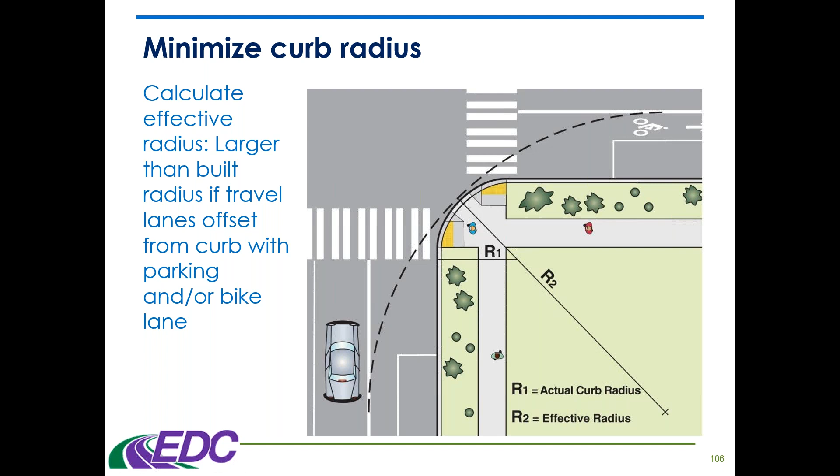So here we see the effective curb radius. We've got a bus in the picture, another big log truck, and we can see they are making this tight turn and they're not driving over the curb, which is good.

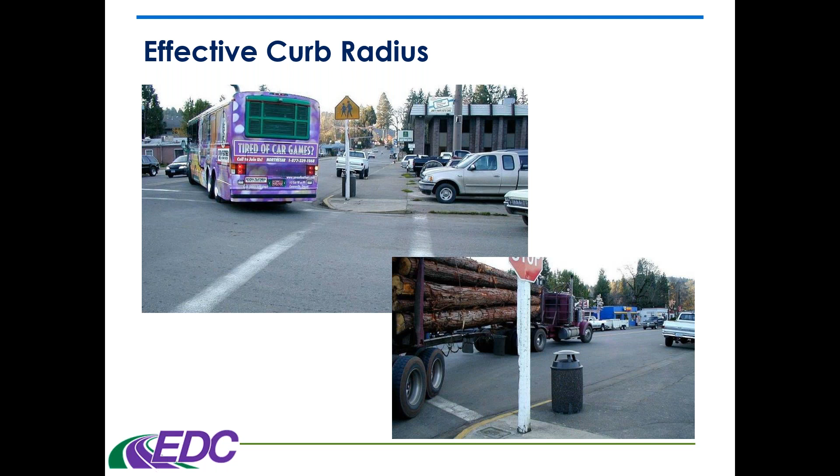Sometimes we can install a truck apron as an option to help out with these larger vehicles. The picture we see is a retrofit you can do to accommodate larger trucks but keep smaller vehicles from making fast right turns. We're using a modern roundabout truck apron design, 2 to 3 inches high, with a different color and pavement roughness from the roadway and sidewalk. The crosswalk should go all the way to the sidewalk, so the truck apron is not confused with a curb extension.

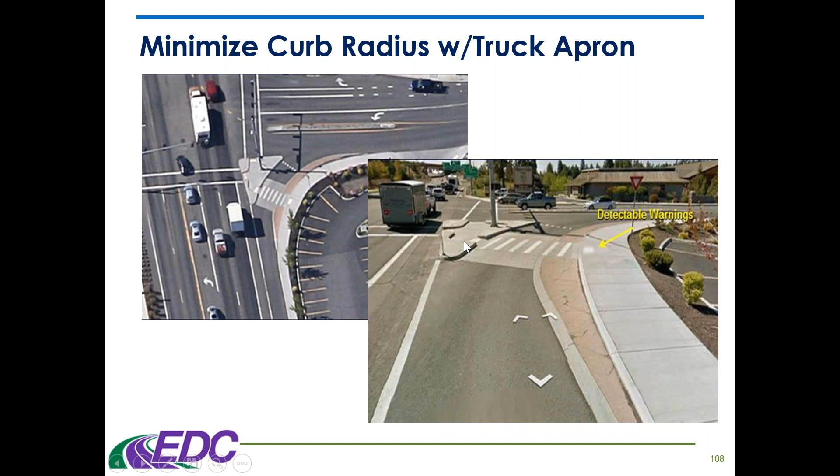Okay, so those are some treatments there involving the radius and curb extensions.

Next, let's get into crosswalk visibility enhancements, and we'll do that with crosswalk lighting. You saw that in the video at the beginning. Lighting always adds safety to anything. We would love to have lighting in all of our 2-lane rural roadway curves if we could. When we add lighting to our crosswalks, we see a crash reduction factor anywhere from 42 to 59%.

We can accommodate impaired drivers with guardrail, rumble strips, clear zones, etc. But what can we do for impaired pedestrians that also benefits all pedestrians? That is lighting. Being able to detect someone at night sooner might provide that 3-mile-per-hour difference between a fatal and minor injury.

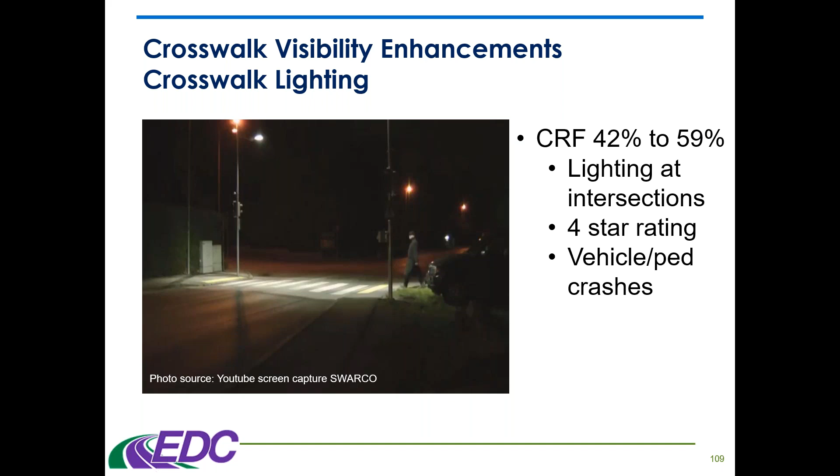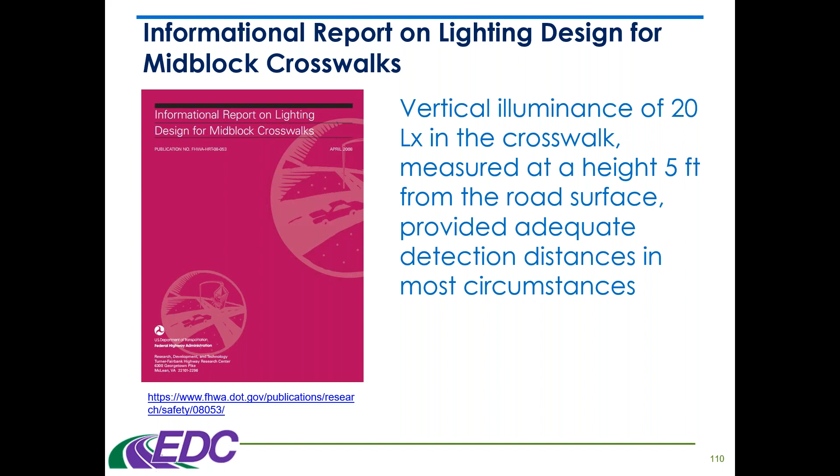There was a study done that resulted in an informational report on lighting design for mid-block crosswalks. Lighting is complex, so this report provides some general recommendations for pedestrian crosswalk lighting. As we read this, you might want to know what an LX refers to - it's a lux, a measurement of light. So vertical illuminance of 20 lux in the crosswalk, measured at a height of 5 feet from the road surface, provided adequate detection distances in most circumstances.

When we talk about lighting over crosswalks, the old way of doing it was the traditional mid-block crosswalk lighting layout. We had to light directly...

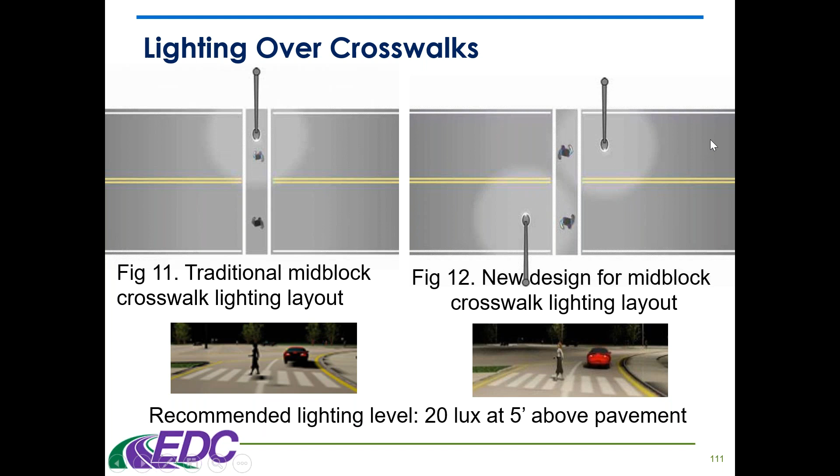Okay, thanks. So instead of installing the light post directly over the crosswalk, we want people to switch to the new design for mid-block crosswalk lighting layout. When a car is approaching, the light is actually lighting up the entire roadway even before the crosswalk, and they're doing that from both sides, providing more light to approaching motorists in both directions.

I don't know if anybody in the audience today has had experience with this? You know Ray, actually just play the video, let's keep going. I'm worried about you getting through the content right now. Okay, they're an incredibly interactive group - we love that.

We can't hear the sound, so you're going to need to narrate this for us. Ray, if you're narrating it for us, you're on mute. Well no, I was letting you listen to it. Oh no, we can't hear it at all. Okay, you can't hear it. All right, just move on. Well, we'll send the link out to everybody.

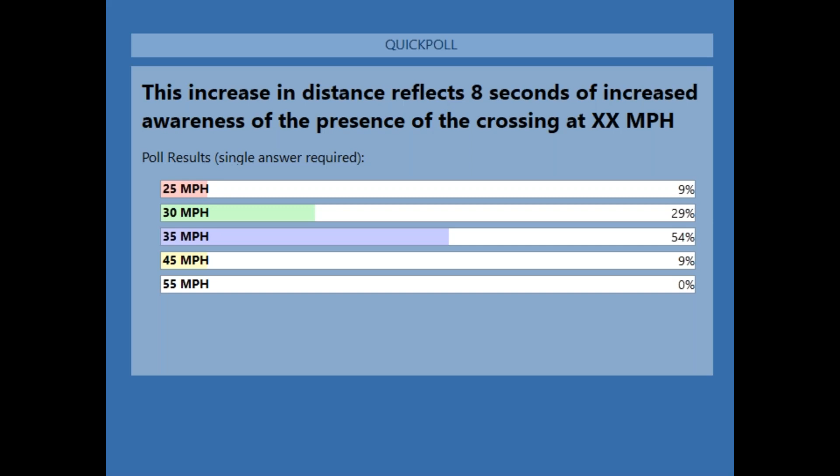All right, I'm going to close the poll up and share that. We've got 9% said 25, 29% said 30, 54% said 35, and 9% said 45. The answer is 30. It's based on a speed of 30 miles per hour.

All right, let's see if we can get another poll question in here. And again, that was through Texas A&M, they do a lot of research that ends up being put into the MUTCD on lots of different subjects. Okay, the next one: which of the following are advantages for installing curb extensions?

We've got a good number of people voting for the same answer, and people are also putting that same answer in the question box. What was the question? I can't see the question. I know, I'm sorry. Which of the following are advantages for installing curb extensions?

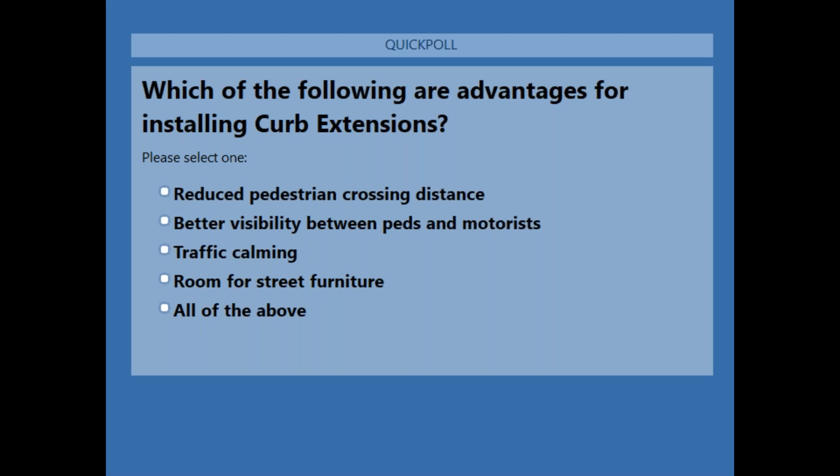I'm going to close that poll up and share the results. 98% said all of the above. And then, yes, that's correct. Okay, good. There we go.

We'll do one more before we wrap things up. Launching this one. Okay, the larger the radius is at an intersection crosswalk, the safer it is for a pedestrian. True or false?

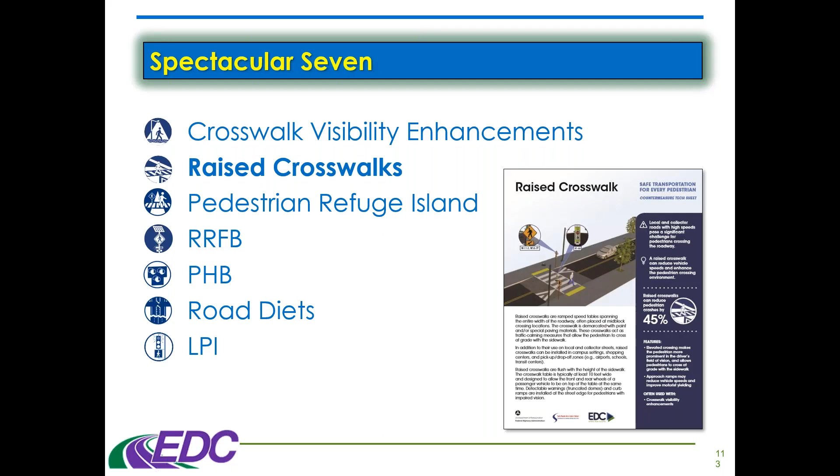Boy, they're voting fast and furious on this one. Okay, I'm going to close it out, and we have 12% that said true and 88% that said false.

Why is it false, Ray? It's false for a couple reasons. It makes it a wider area for the pedestrian to cross the street, and then a lot of times the motorists, as they're making the turn, they don't see the pedestrian until they're almost right up on them.